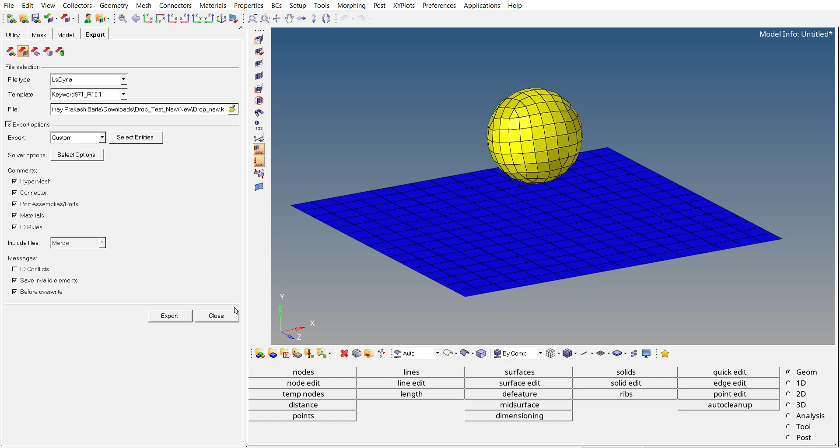Once you have done that, you need to open the LSDyna solver, so I'll just open that. If you can see my screen, I've already opened the LSDyna solver. Here in the input you have to select the .k file, and then it will reference here, and you have to click this play button, and then it will start to solve. I've already solved it.

If you can see here, the status shows finished, normal termination. Just in case there is some error, then it will become red here. But there was no error, it ran fine, so it's green here.

So we'll move on to see the results. If you can see my screen now, this is basically the HyperView window where we can check the results. I have already opened the model, and I have selected the result type as stress, von Mises stress. I'll just click on apply, and then we'll click on play.

So if you can see, as the animation plays, there's a change in stress in the ball, correct? You can see the legends here. So basically the stress is changing as the ball is moving along the y direction, after hitting the floor. Next we'll check the displacement.

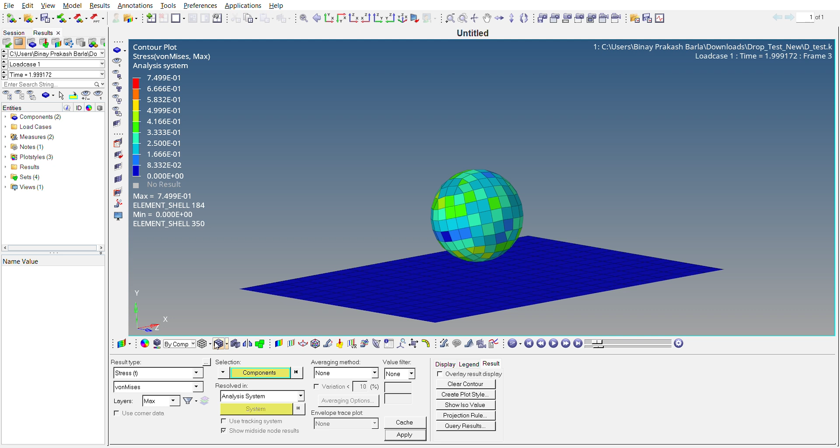So we'll just click on apply, and we'll just play the animation. Just zoom out a bit. Okay, if you can see how it's going, correct? Just slow it a bit so you can see how it is going.

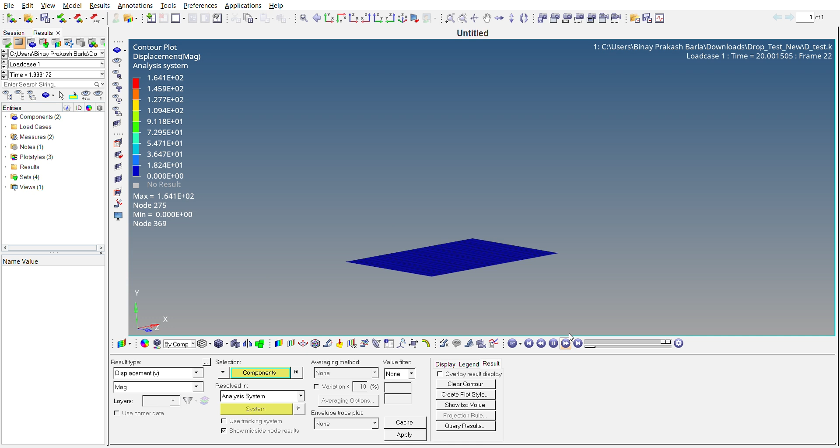Okay, we'll just see the acceleration part, or we'll just see the internal energy part just in case. We'll see the internal energy, how it's changing here. We'll just see how it's going.

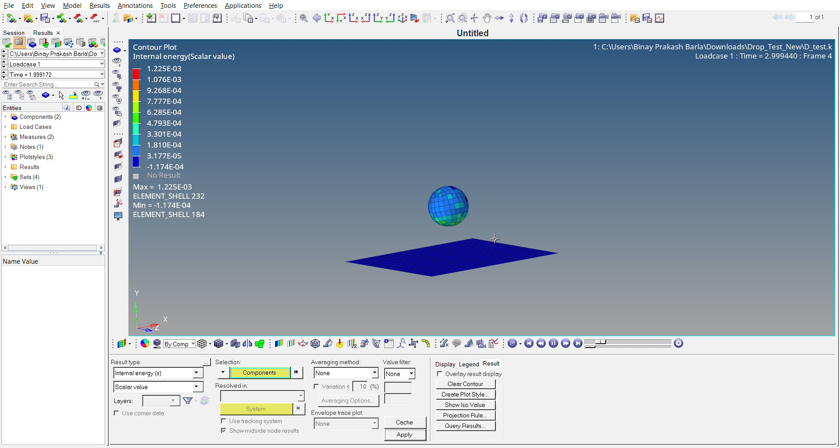So basically that is how you do a drop test. It's pretty straightforward, and you can just select what all you want and check it out here. So basically you can check the displacement, acceleration, velocity, stress. Stress is the main factor we check here, if it's damaging the product or whatever the object is falling.

Okay, so I think this was pretty short and simple and straightforward video. So I hope you got to learn something new.

And just in case if you want to put some extra value in the curve, suppose you are not using a free fall, you are throwing it, there can be a case where you can be throwing the ball instead of it being in a free fall. So in that case you just need to change the values in that curve and you can observe the change in results.